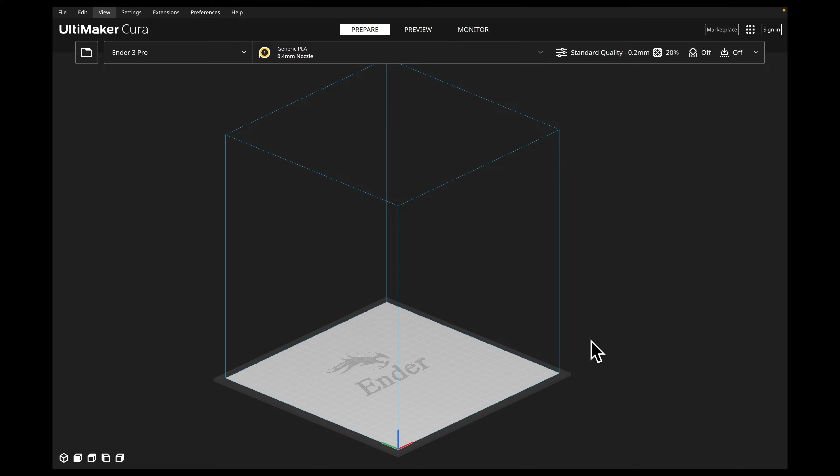Alright, so now that we're in Cura, what we're going to do is come up here to the Marketplace, and we're going to install a plugin. The Marketplace is a bunch of plugins that you can add into Cura to help you with certain things. What we're going to get is Auto Towers Generator. 2.6.0 is the one that I'm going to be downloading.

Now, if you can't find it, you can just come up here to the search bar and type Auto and then Towers, and right here it'll pop up for you. All we're going to do is come over here and click Install. And after you hit Install, this little pop-up will come up asking, do you agree to all of the terms of this?

And we're just going to click Accept, because if you decline, you don't get the plugin. Alright, so after you've installed a plugin, the important thing to do is you have to quit Cura and restart it. So let's go ahead and restart Cura. All right, so now we've restarted Cura and we are ready to get a temperature tower.

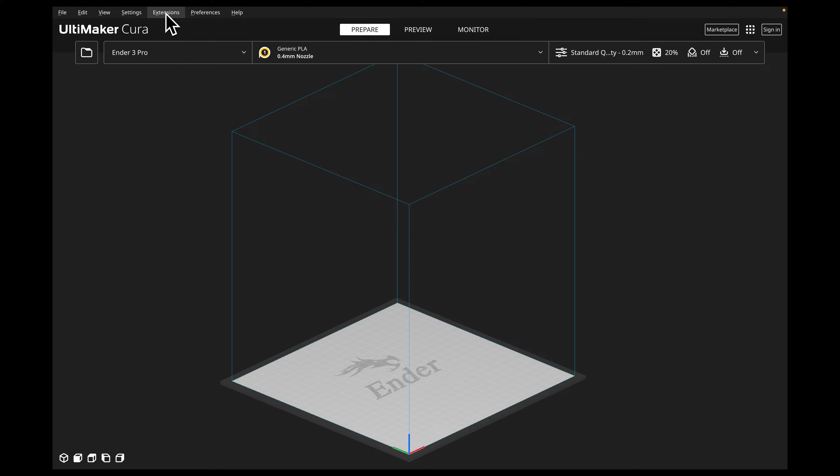So once that's installed, all we have to do is come up here to our extensions tab in our menu. Then we come on down here to auto towers. Now we have all of these settings available to us, and these are all calibration tests that we can run. Now we're going to come all the way down here to the temperatures. And I am going to be using PLA+, so I'm going to click on PLA+.

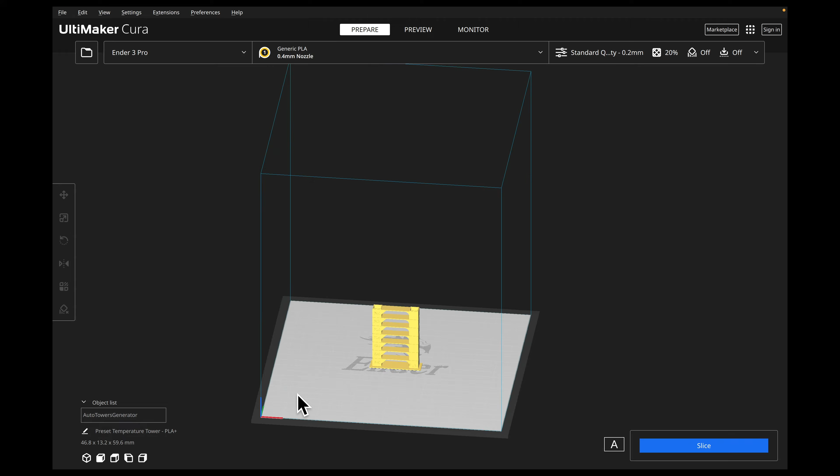And now once you've clicked on it, you're going to see this little tower that has shown up on your print bed. And let's take a look at that. So once it's on our print bed, we're going to see these segments. And at each segment, it's going to be printing at a different temperature. Your first layers are going to be printing at 230 degrees, and then each segment it's going to move by 5 and then end on 200 degrees.

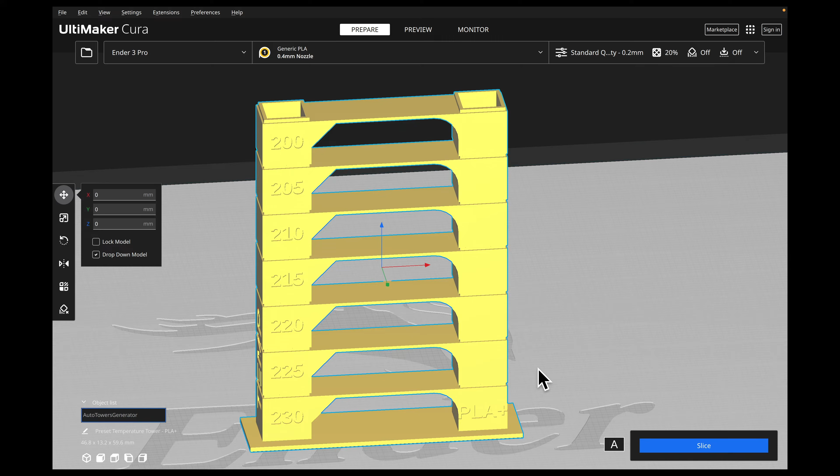You can also note that in the corner right here, it says the type of filament you're printing. So this is PLA+, and you can see that PLA+ little word right there. And another nice thing is it says temperature on the side right here, because there are other settings and tests that we can do with this plugin that look the same, but it's testing different things. So this is a big help.

Now, one thing important to do is you need to change the layer height to match what you're actually printing. So if I'm wanting to print at a 0.1 millimeter layer height, I need to go to my quality tab to layer height and change it to 0.1. But for this test, I wanted to do a 0.2. So the great thing here is it's already calibrated to the different temperatures and I don't have to do anything. All I have to do is change my layer height and hit slice.

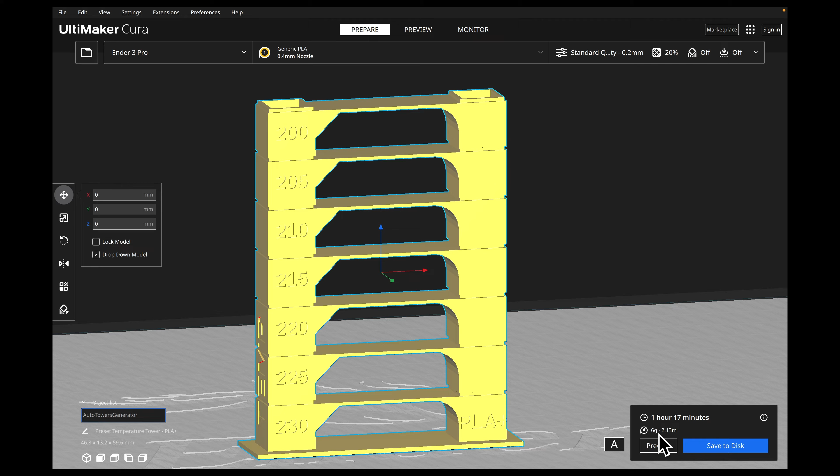So you can see that this is only using 6 grams of my spool. So this is only printing 6 grams of filament. There's 1,000 grams in a spool. I get this one complaint all the time: I'm not wasting all of my filament on a stupid test. This little tiny test can save you so much wasted filament. And it's 6 grams. It's actually less than 1% of our entire spool. So keep that in mind.

I know some of you out there do not want to waste your filament, but if you don't have the right temperature, you're going to be wasting your filament, and it's going to be on prints with a lot more filament. So it's worth using this little bit of filament at the beginning of your spool just to make sure you have the right temperature.

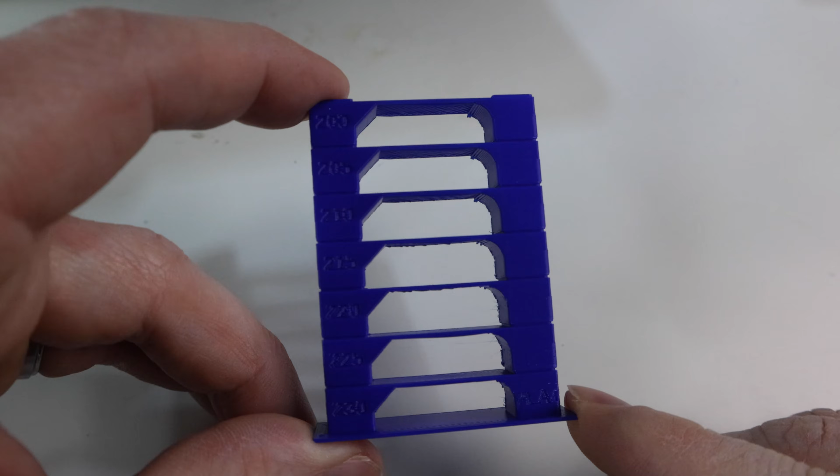So now we have our temperature tower all printed out, and if we just look at it, I mean, it looks great. Would you just look at it? You don't really see any blobs or zits, which is a very good thing, but this is a little deceiving when you're just looking at it like this. So let's get a little closer and really inspect this temperature tower, because from this vantage point, it looks like any temperature is good, but that's not true.

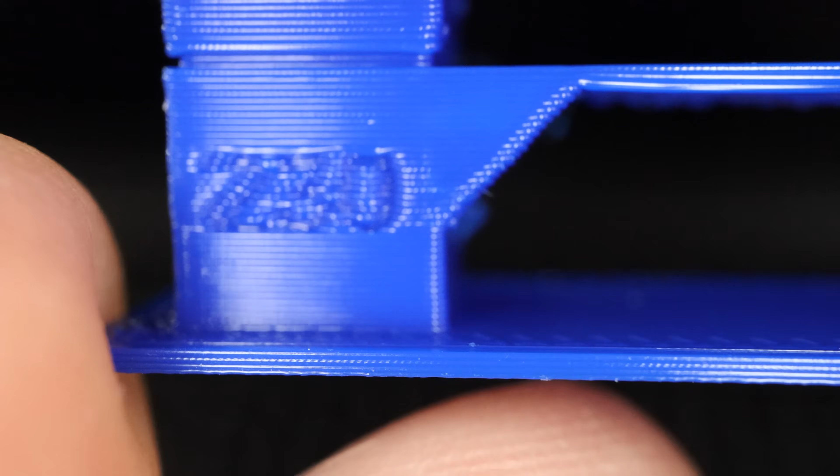All right, so here is with a macro lens, and we're at 230 degrees. That number doesn't look too clear, but when we're really looking in here, you can see that we have a little bit of drooping and oozing right there on the bottom corner. And we also have some stringing right there. And this is where you can really see some of those blobs and zits that we really couldn't see without really inspecting it.

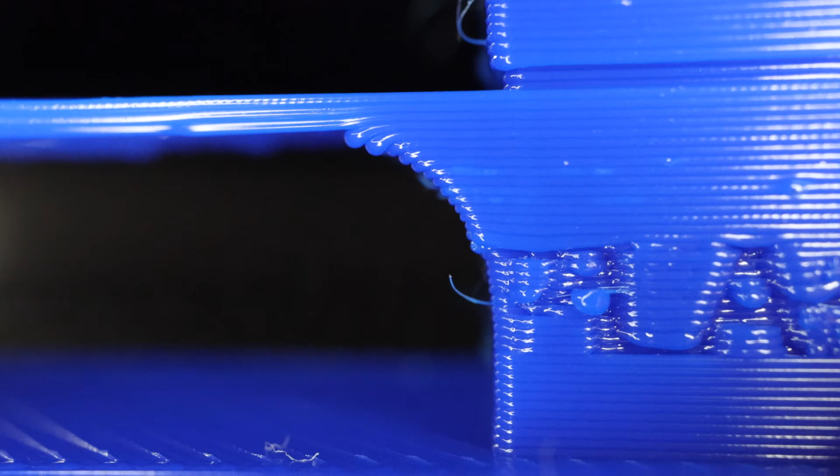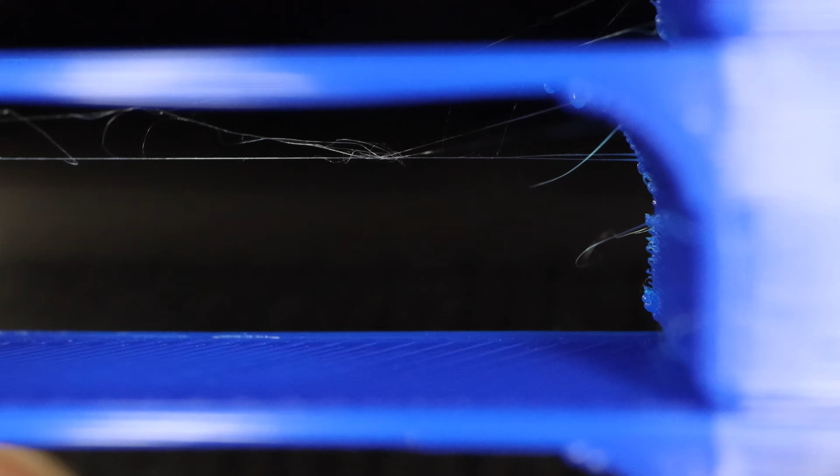So you can see some of these overhangs and how they just kind of oozed, and they don't look too great. So let's move up to 225. Now at 225, you can definitely see that stringing, and you see how your corners have a lot of that oozing and blobbing on the sides. Here, let's turn this around, and you can see how gross those look. So that is not a good layer.

And now let's go to 220, and you can see right there, right in between the 2 and the 0, we have this big oozing zit. And that means our filament is just too hot. And also you can see all of this fine angel hair stringing. And that is something we definitely don't want. You can also see right there all these little divots and pock marks on the face of this square, and that is also something we don't want. That is where it was retracting when it was lifting up to the next layer.

Now let's go to 215. And if we see here on 215, we've got more of this angel hair, and that is definitely something we don't want. We can also see right here on the corners and where these overhangs are, we've got some blobbing and some zits on it too. So 215, definitely too hot.

Now we're going to look at 210. And if we see here, we've got more of that stringing, but something else we have is some more separation. We've got bigger separation on that bridge right there. And that is something we definitely don't want. Even though now, if we look at our sides, look how clean they're looking. I mean, we don't see any of those zits anymore, which means we're getting really close to our temperature.

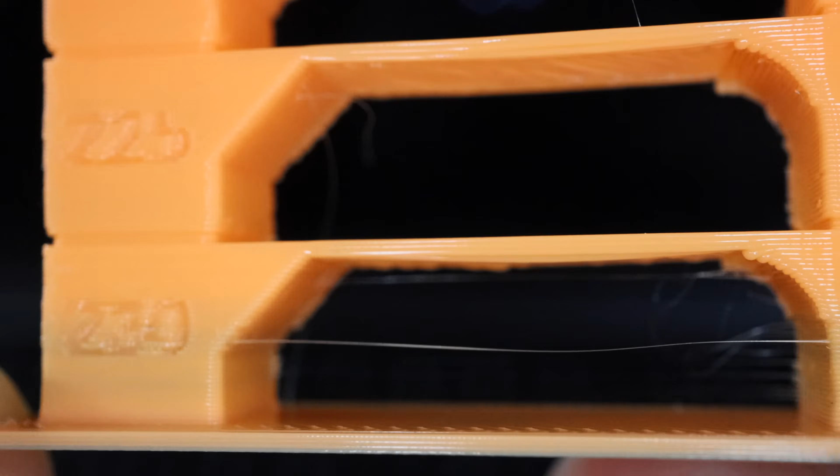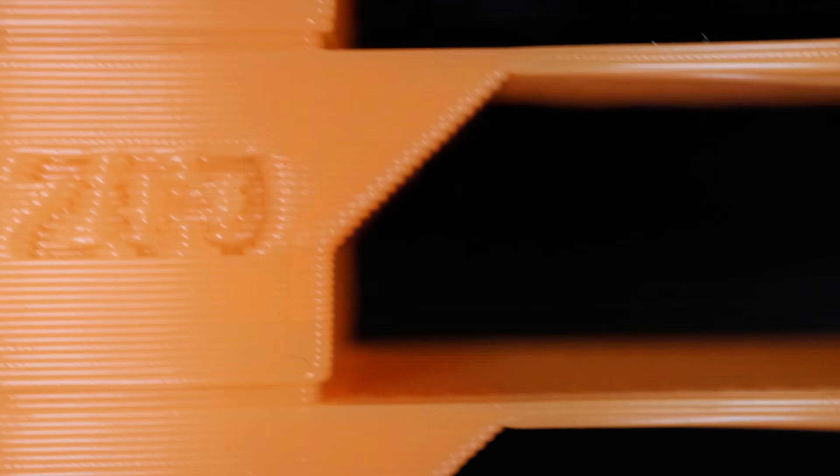So let's start at the bottom again, and we can see at 230 degrees we have stringing. 225, we still have stringing. Yup, we still have it at 220. And there's some more at 215. 210, do we have any? Yup, right there. 205, oh, see that one down at the bottom? Still got some. So at 200, this one's looking really nice.

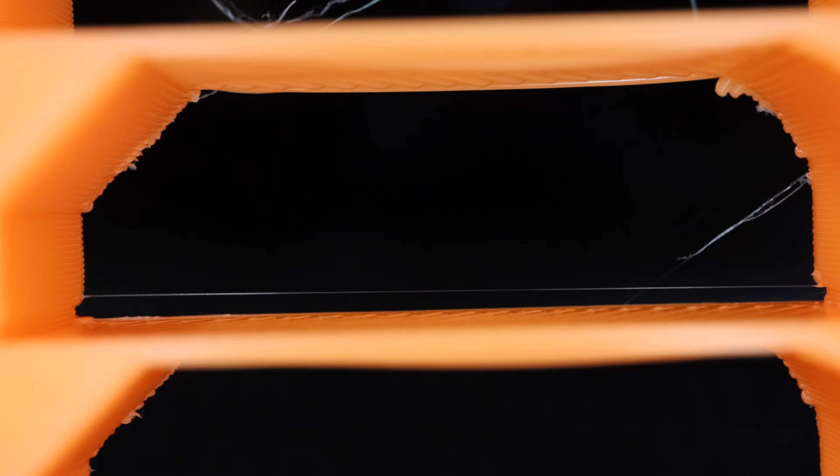Now let's go down to 195. And 195 is looking nice too. How about 190? We're going to go across 190. Now let's go to 185. And you can see there, we're starting to get some stringing. Now we have 180, and if you see here, it is an absolute mess because it couldn't keep up. It couldn't keep pushing out that filament at 180 degrees. So it got almost to it, but when it started getting to the bridge, you can see that it just stopped pushing it out.

And it would just come out in spurts because the filament was not hot enough. And this is what it looks like when you're printing way too low, because we've got some stringing all the way through it here. Then we also have all of these lines that couldn't even finish because we were just forcing this through the nozzle and it just was not working out. So this right here, that means that we're printing way too low.

So once we realize this, now we have to go back down and find the right temperature. And 190 was looking really good all the way to 200. So what we're going to do is we're going to inspect the sides. We can see right where the bridge, this was oozing out a lot. And then right here at 195, it wasn't so much. And then it's a little bit less on the 200.

So for me, I would probably go with a 200, because if you see on the edges of that triangle right there coming off, those edges aren't looking too clean. They're looking worse here. And if we go around, we can see that that's at 190, that's at 195. So if we spin this around, the middle one right here is a 195, but the 200 degrees, it's looking a lot cleaner. And then if we go down, it starts getting messed up more. So this tells me that 200 is the optimal print temperature.

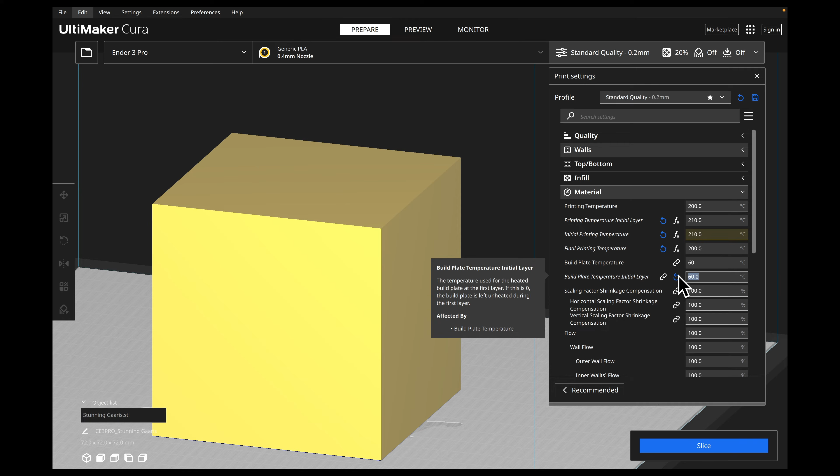Let me show you where we change it. Our next setting after build plate temperature is build plate temperature initial layer. So for our very first layer, if we want this print bed to be really heated up, this is where we would change it, and I would say go up maybe about 10 degrees.

So we have one more setting when it comes to temperatures in the material settings, and that is our scaling factor shrinkage compensation. Basically, if I have a cube that's supposed to be 10 millimeters, and when I print it, it actually turns out to be 9 millimeters, that's the shrinkage of our plastic when 3D printing. So we can adjust this setting to accommodate for that, and then it will 3D print it at 10 millimeters.

So how do we actually find what our shrinkage compensation percent is? It's pretty easy. If your cube is supposed to be 10 millimeters, and you measure the final printed cube and it's 9 millimeters, all we have to do is divide the number of what it's supposed to be by the number of what it actually printed. So 10 divided by 9 is 1.11111. We just move our decimal point over 2 spaces and we have 111%.

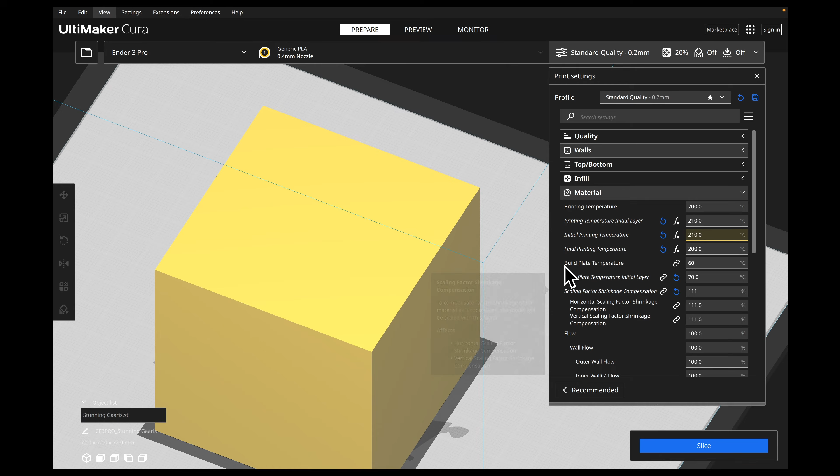I know this is probably a little confusing, so let me show you what that actually does in Cura. If we come down here, we can see scaling factor shrinkage compensation is at 100%, and that means it's going to print this model exactly how it looks right now. So let's say this is not the right size and it prints too small. All I would do is come right here and put my 111%. Now, the one thing you want to notice is this dark gray area.

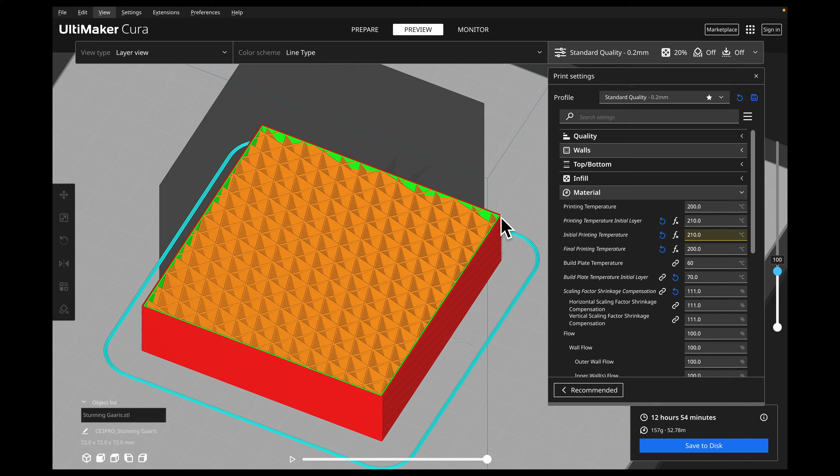This is the actual perimeter of what's going to be 3D printed, so if we slice this, this is what it's actually going to print. But if I bring this down, you can see this is the original size of the model. Here's the corner of it, and right here is the corner of what it's going to be 3D printing, so this will actually make it bigger.

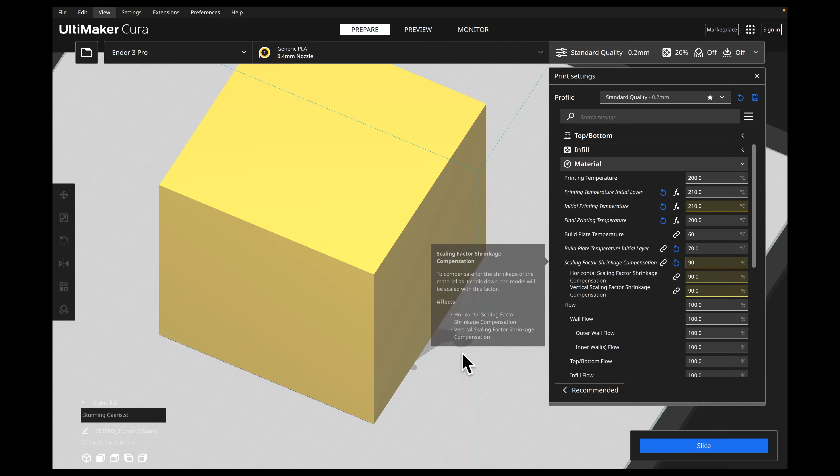Now let's say our 3D print is actually printing too big and we need to make it a little bit smaller. That's where we come back to our scaling factor shrinkage compensation and make it under 100%. Let's say I make it 90, because I did the math and it was 90%. So if we slice that, we can see the printed cube is inside this gray box, and this gray box is the actual dimensions of our model we're 3D printing. So if it's getting too big, we want to go under 100, and if it's printing too small, we want to go over 100.

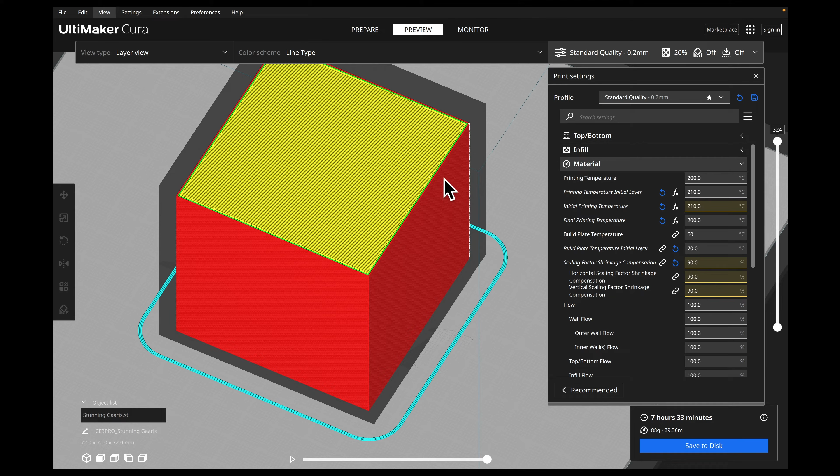So the next two settings deal with our horizontal and vertical when it comes to our scaling factor shrinkage compensation. The horizontal is only if you're wanting it to be wider or thinner, and your height is perfectly fine. But on the other side, if your 3D prints are turning out perfect on the sides but the top is not the right dimension, this is where you can use your vertical scaling factor shrinkage compensation.

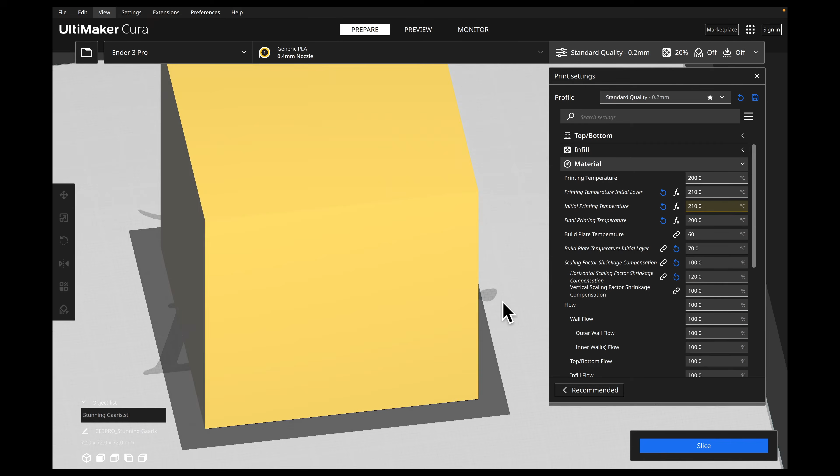So let me go ahead and show you how to change these two settings in Cura. We're going to change this back to 100%, but now we're only going to go to our horizontal scaling factor shrinkage compensation, and I'm going to make this at, let's say, 120, so you can really see what's happening here. If we look down here, we can see that this is coming out all the way right here, but we also don't see anything on the vertical, this is right up against the edge. But if we look at it at this angle, we can see the X and Y have been scaled out so it can compensate for that size. And just like we did previously, if we want it smaller because it's printing too big, we can go to 90% and slice that.

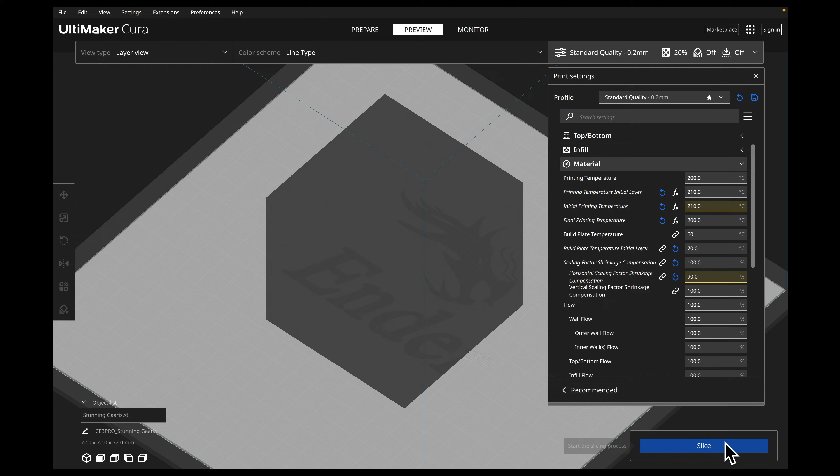Now we can see that it's shrunk in, and if we look at the top here, it stops right at the top of our model. So let's bring this back to 100%.

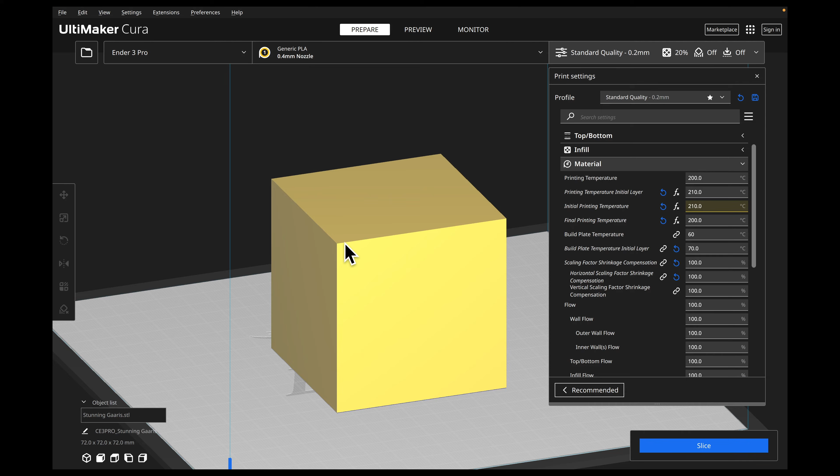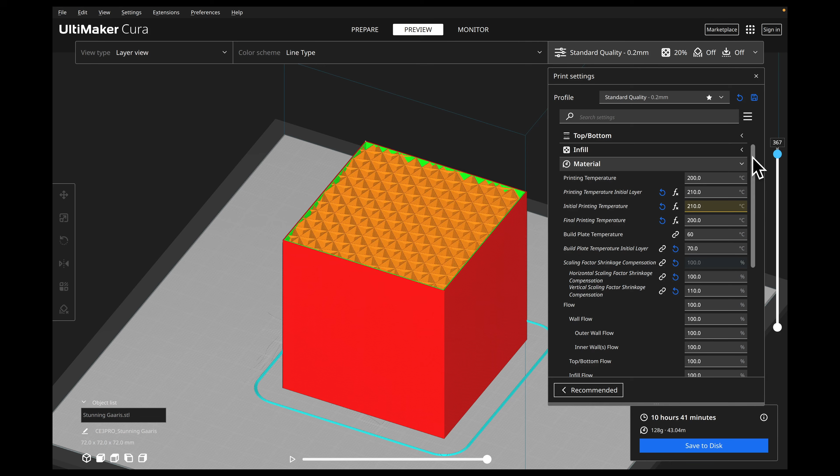Now the next thing is the vertical scaling factor shrinkage compensation. This works the exact same way as the horizontal scaling, but it only focuses on the vertical, so our X and Y are not affected in any way. If we need this to be a little bit taller, we can come in here and go to 110%. Now if we go into our preview, we can see how it just jumped up, and it's printing a lot taller than it needs to be. Right here is where our original is at, and you can see it just keeps going. So if you need it to be a lot taller, this is where you can change it.

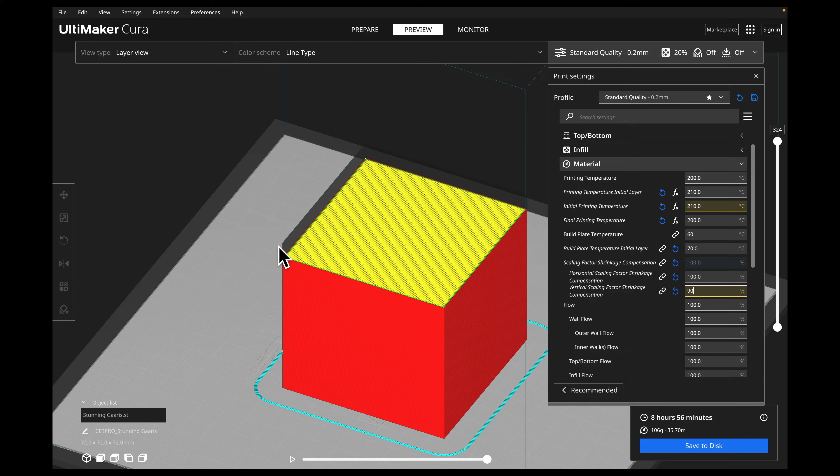Just like we've done on the previous ones, we can make this a lot smaller. So if it's printing too thick of layer lines, we can go to 90 and then slice that. Now this is the top of our layer, and you can see this is the actual top of our 3D model.